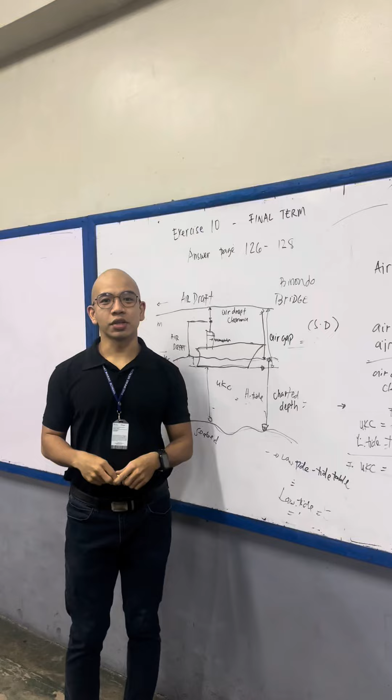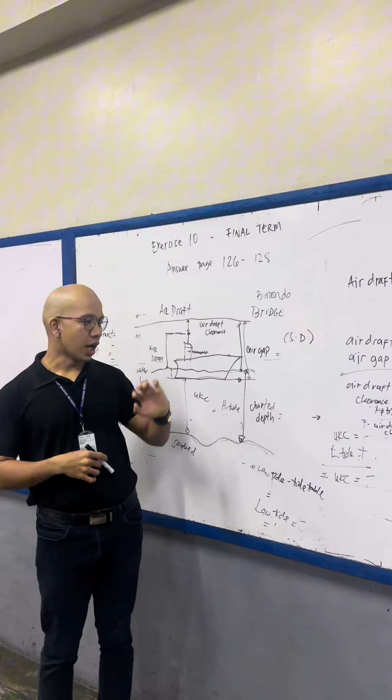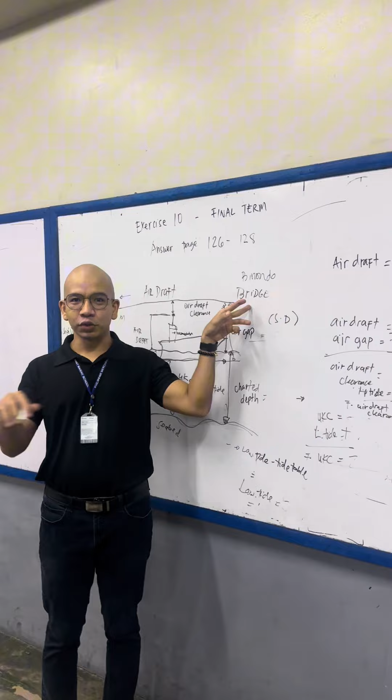Our tutorial for today is all about air draft calculation and how we can get the air draft clearance from the bridge until the seabed. Our discussion focuses on the safety of our vessels in terms of passing below the bridge. So when we pass through a bridge, what do we need to consider so that we can calculate the air draft clearance.

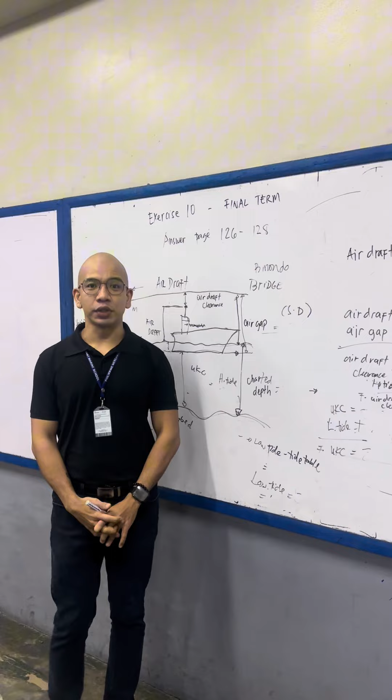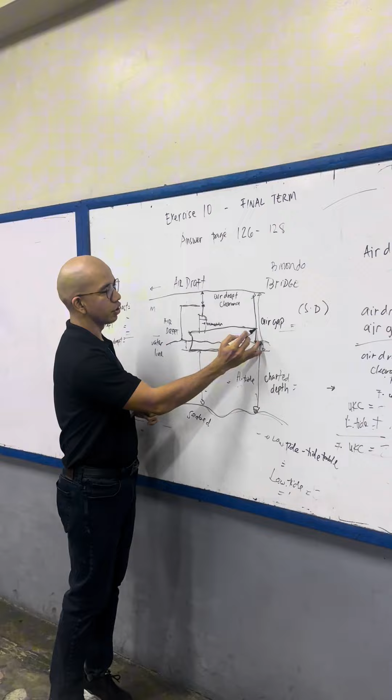Let us define the different terms related to this discussion. Number one, air draft. For example, I draw a vessel here. So this is our vessel. And this is the bridge, accommodation, and this is the antenna of our vessel.

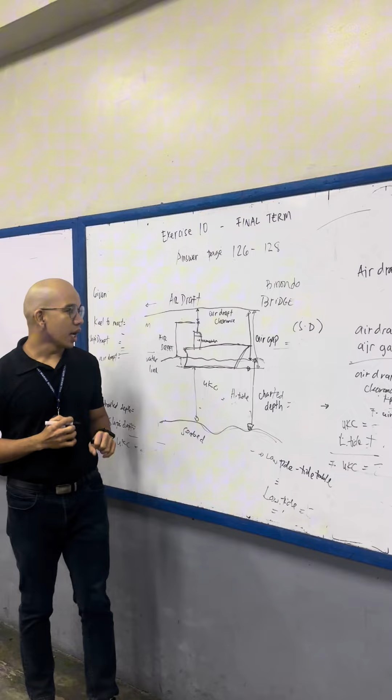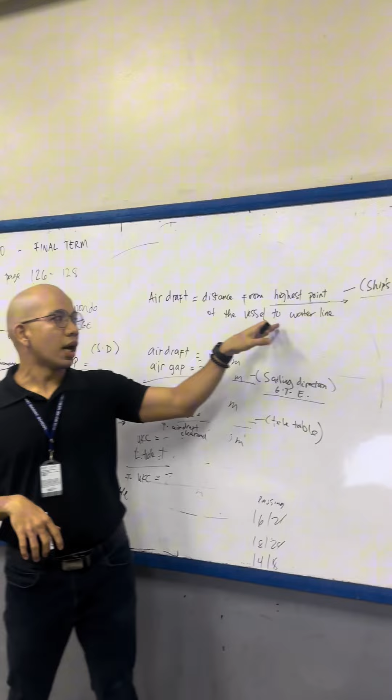We are talking about air draft. So the air draft is the distance from the highest point of the vessel until the water line. So how high is the antenna of the ship? That is the key goal of our discussion. So to know that, we need first the dimension of our vessel.

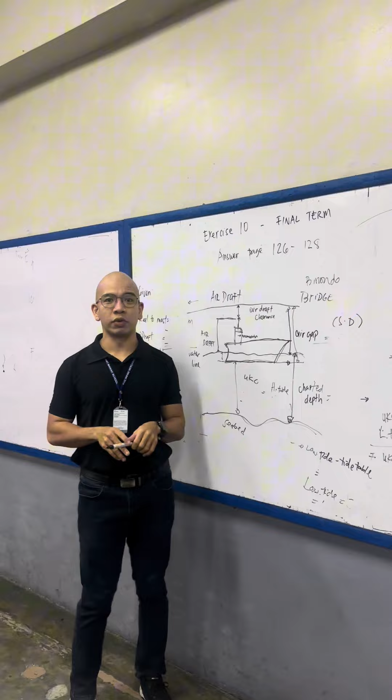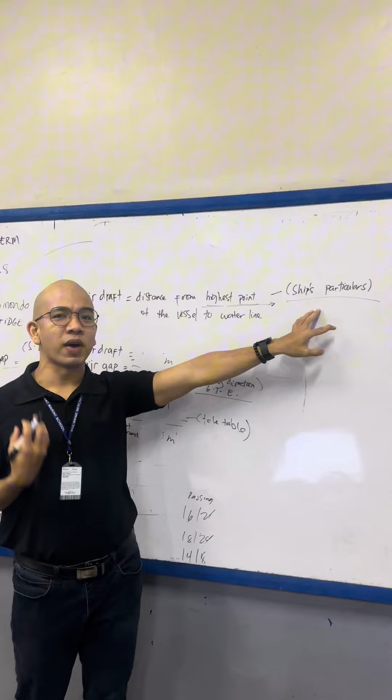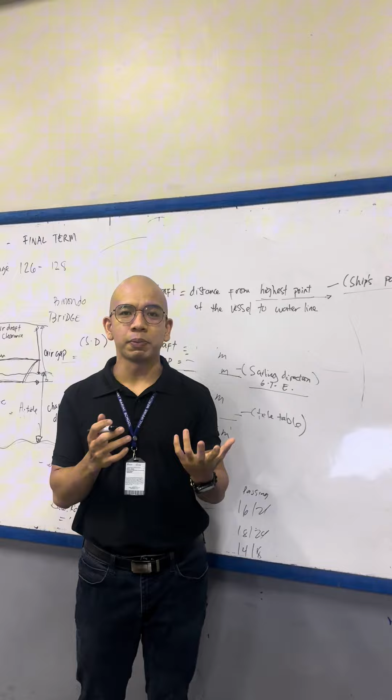The first thing that we need to do is find the highest point, where we can get this from the ship's particulars. Ship's particulars are documents provided to us that give different details depending on the vessel's construction, in terms of length overall, highest point, breadth, and etc. We will be posting the picture later showing where we get this distance.

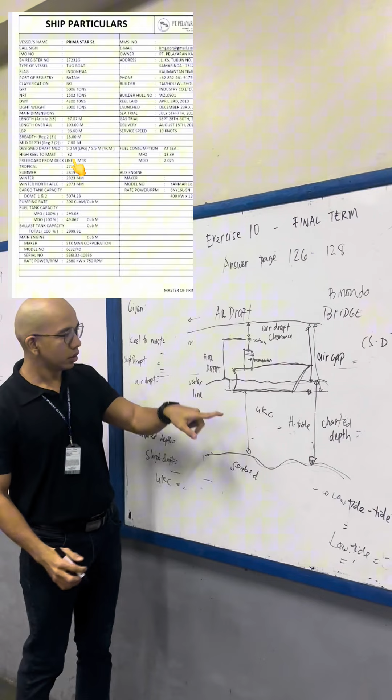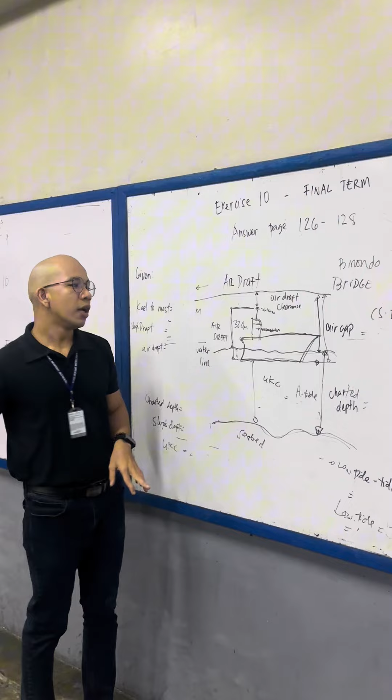So the distance from the antenna until the keel is 32.0 meters as per ship's particulars. Then our ship's draft was provided to us, as defined, 8.0 meters. So let us do the math: 32.0 minus 8.0 meters.

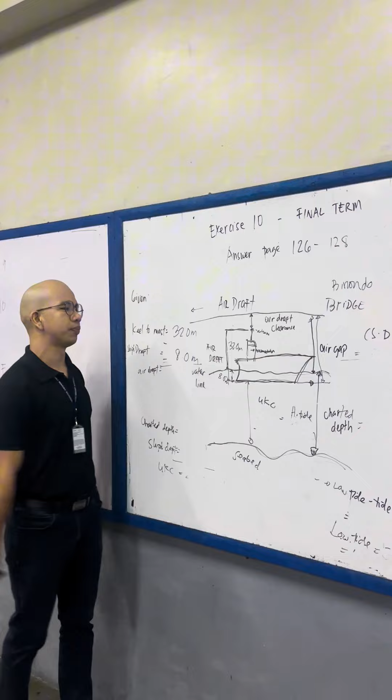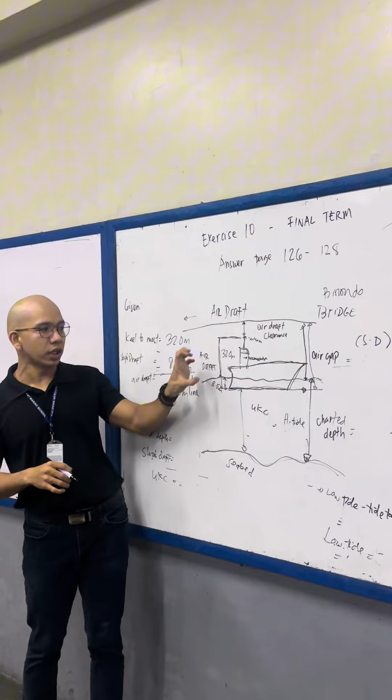So the answer will be 24.0 meters. You just subtract 32 from... you subtract 8 from 32 so that you can get the air draft. So the air draft is the distance from the antenna until the water line.

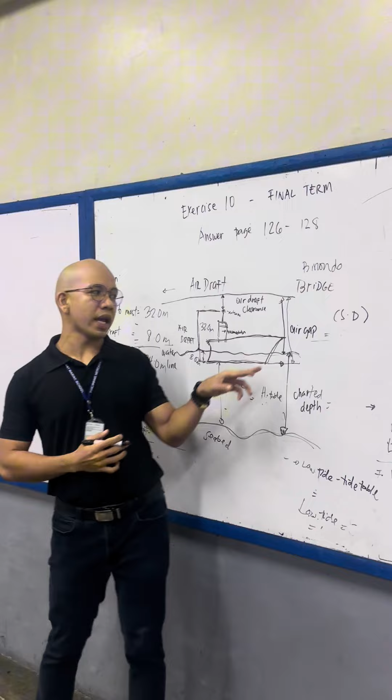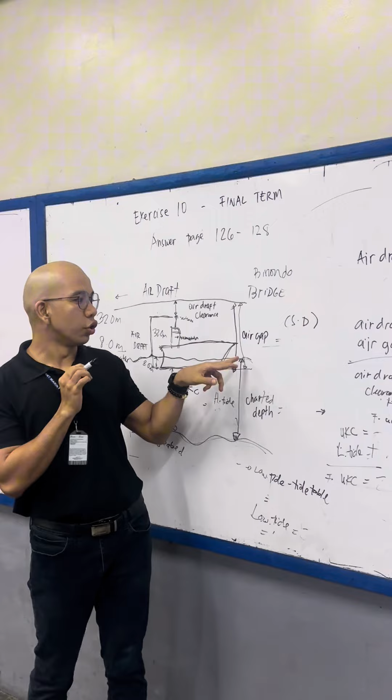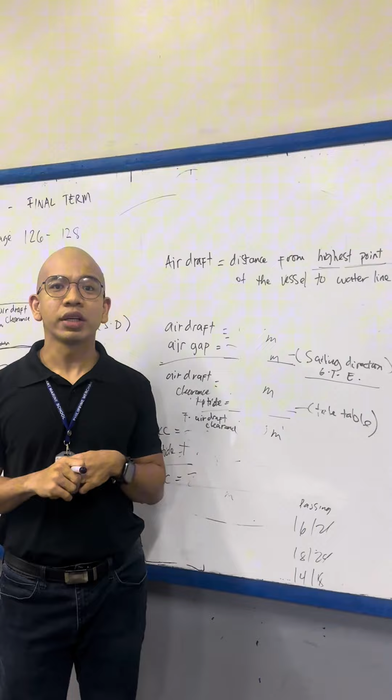Next key detail that we need to get is the air gap. The air gap is the distance from the bridge until the water line. We get the air gap depending on the sailing direction, from books, sailing directions, guide to port entry, or if the agent provides us the air gap, then we calculate the vertical clearance.

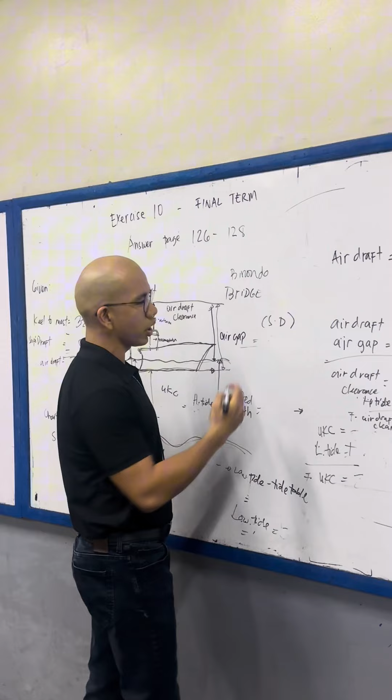So our air draft is 24.0. Air gap, we get it from the agent. They gave us 18.0 meters. So what we will do is subtract 18.0, and the answer is 6.0.

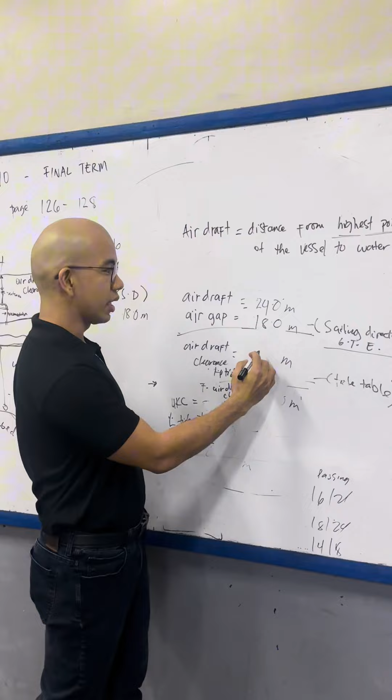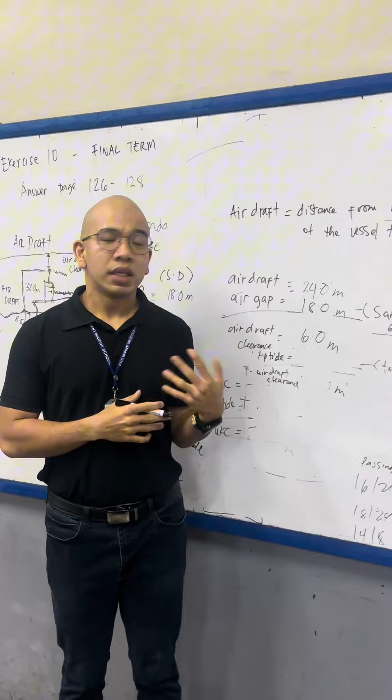There was also a tide. We need to consider also the tide or squat. So for this, these are all static air draft calculations, meaning the vessel is not moving. But if the vessel is moving, we can consider also the squat, bank effect, and etc. But for this example, we only consider the draft and the tide.

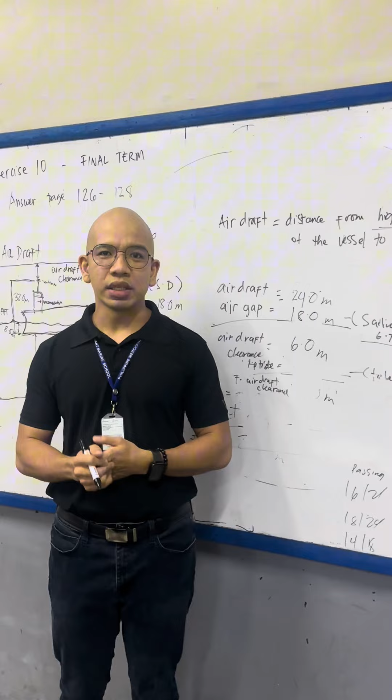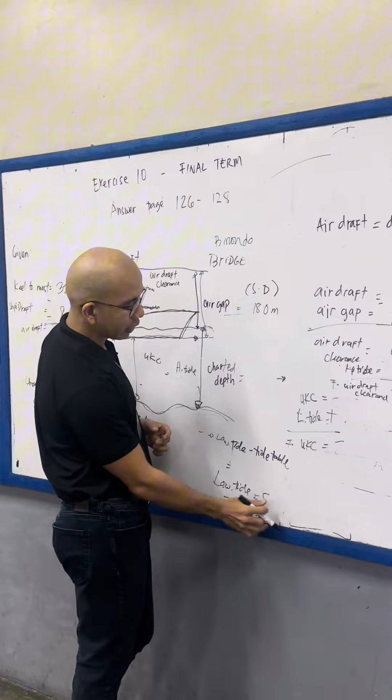For example, according to the tide table given by the agent, there was a low tide. A low tide of 3.0 meters occurred.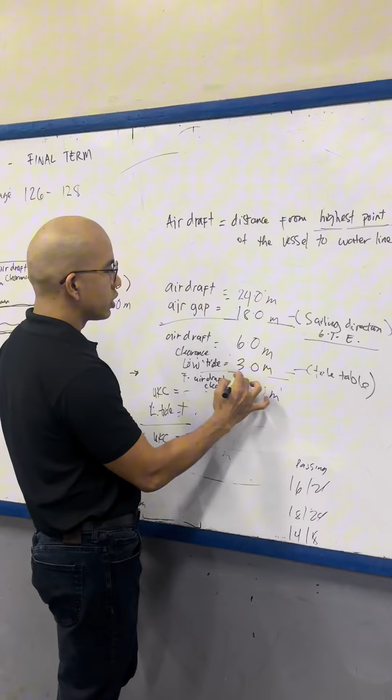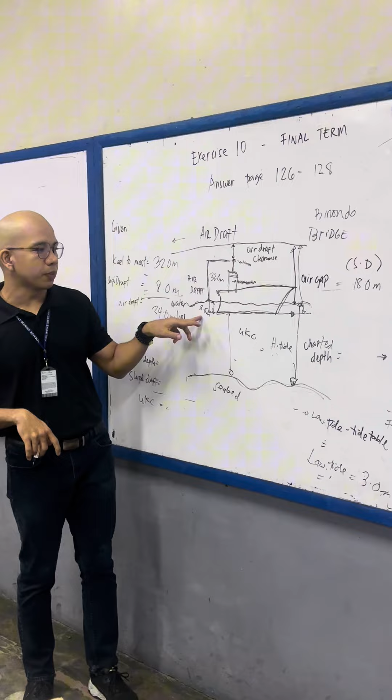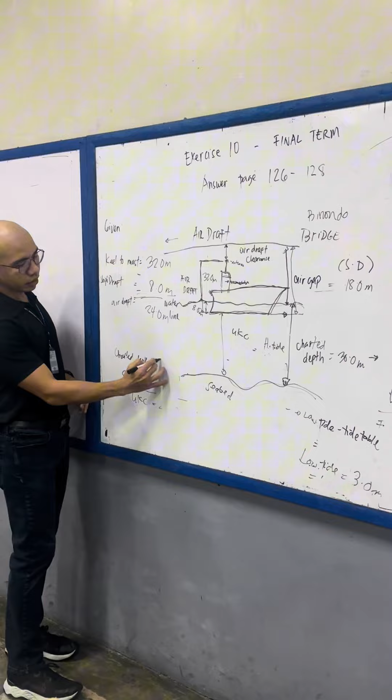Let us understand the principle first before we do the math. Low tide - so here, let us calculate the UKC first. We have the draft here, 8.0, and the charted depth that you see on the paper chart or ECDIS is 30.0 meters. So the UKC is 30.0 minus 8.0, UKC is 22.0 meters.

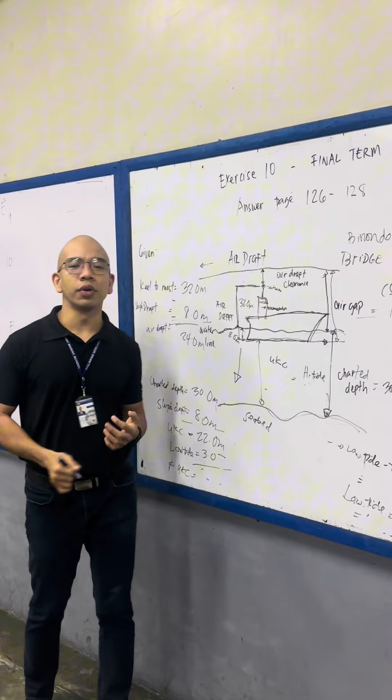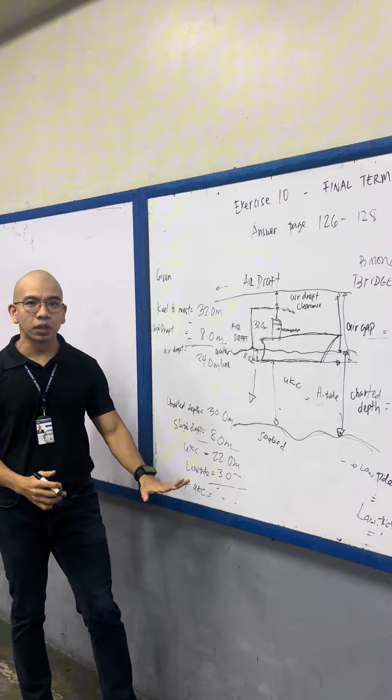Now we're going to apply the tide. The tide that we have is 3.0. So in the principle of UKC, when the water goes down, the UKC also goes down directly. So the answer will be 19.0 meters.

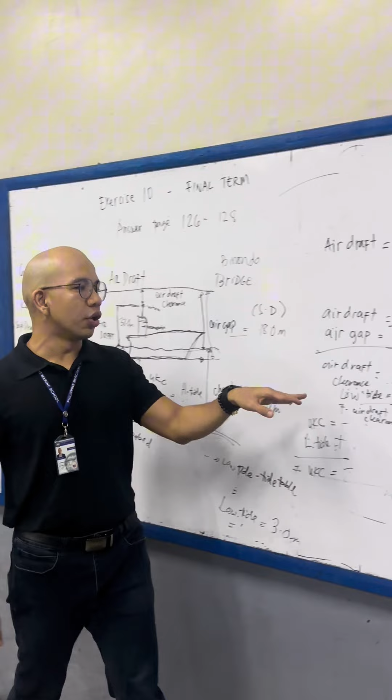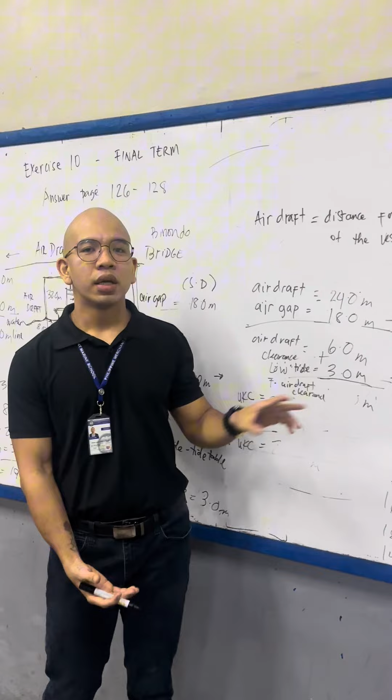So applying the low tide in air draft vertical clearance, we're going to add. Why? Because once the water goes down, the clearance under the bridge gets higher. So we're going to add this, and the vertical clearance, the air draft clearance, becomes 9.0 meters.

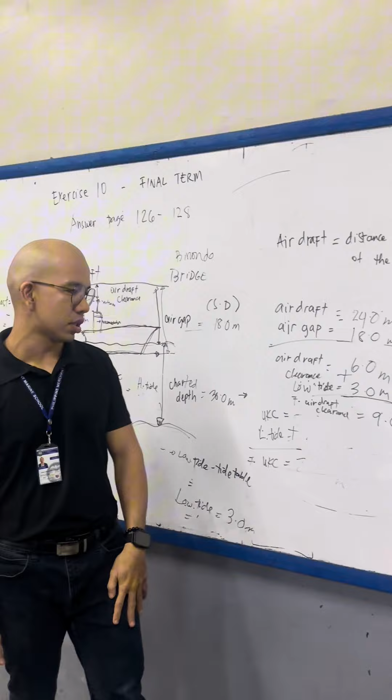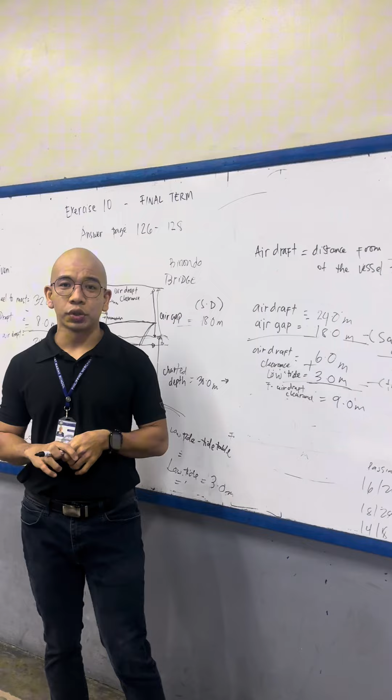So that's how we solve for static UKC and static air draft. But we're going to upload some videos that provide details on squat, bank effect, and etc. So this is the key principle on air draft. I hope you learned a lot.